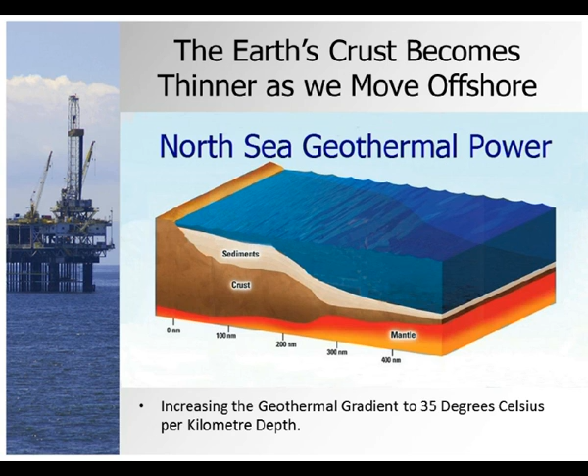If you look at the map of the fields and pipelines within the UK North Sea, there's approximately 230 oil fields and 100 gas fields. There's been over 2,900 oil wells drilled and 1,200 gas wells drilled. There are currently about 450 structures in the North Sea, with a decommissioning cost of between 30 and 45 billion pounds.

But a lot of these structures have only been in place for about 30 to 40 years, and a lot of them have a useful life, especially the concrete structures, of over 300 years. Therefore, what I'm suggesting is that geothermal could be an alternate use for these North Sea structures.

So instead of extracting the oil and gas and bringing it ashore and burning it to generate heat, we just use the natural heat offshore to generate the power directly, without any of the emissions that you get from burning fossil fuels.

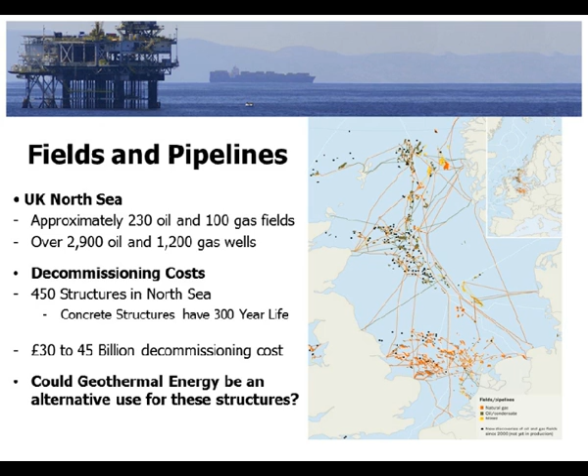One of the advantages of using North Sea structures is that the platforms from which they're drilled quite often drill multiple wells from the same rig.

If you know about geothermal power, the most common system is enhanced geothermal systems. What that means is that you pump water down one or two wells and then receive the steam or hot water at alternate wells after it's passed through the fractured rock structure, which transfers the heat to the water, the working fluid. It then comes up to the surface and quite often goes through a heat exchanger.

So that only a clean working fluid passes through the turbines and generates the power, and then the water is re-injected, so there's no pollution. It's a completely enclosed system, and all you're transferring is the heat from the geothermal field up to the turbines where the power is produced.

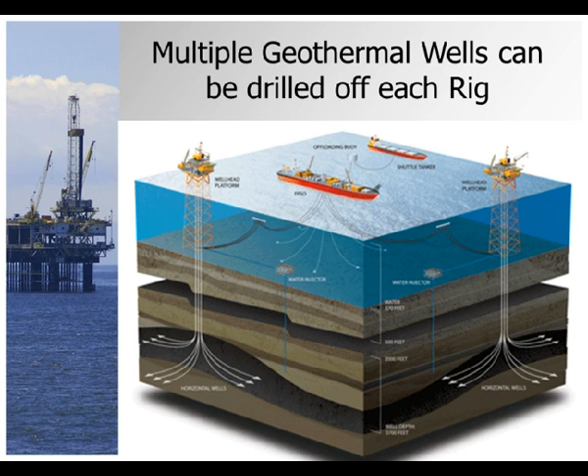Jobs and carbon credits. Geothermal could create a whole new North Sea industry, employing thousands of workers in new productive jobs in the offshore and onshore support industries.

Geothermal power holds enormous opportunities to provide affordable clean energy that avoids greenhouse gases like carbon dioxide. Geothermal energy is true baseload, producing electricity 24 hours a day, 7 days a week.

The continental shelf in the UK, where these platforms are situated, has a relatively thin Earth's crust, about 10 kilometres thick, compared to 40 to 70 kilometres thick on land, giving the wells high bottom hole temperatures. Typical geothermal gradients of 35 degrees centigrade per kilometre have been recorded on the continental shelf.

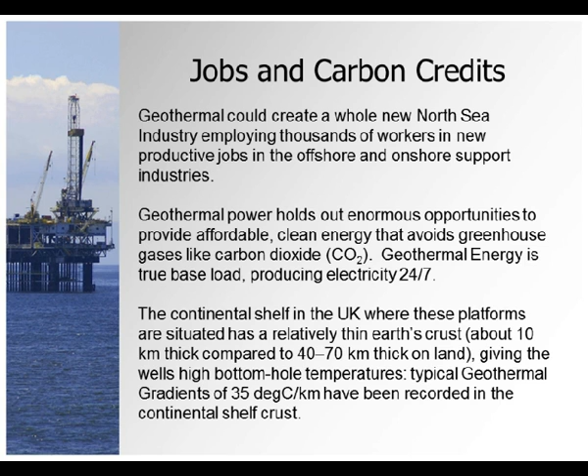The Scottish Parliament has stated no new nuclear power stations within the Scottish borders. Therefore, what I'm suggesting is that geothermal power may be an alternative to this lost power production of the nuclear power station.

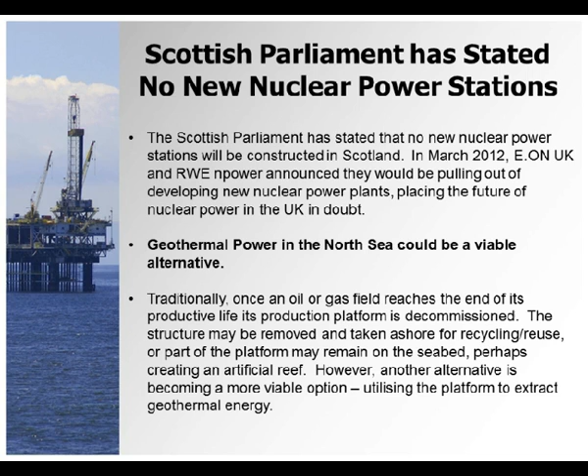And again, as a nuclear power station operates 24 hours a day, 7 days a week, so also can geothermal operate 24 hours, 7 days a week, producing true baseload power.

An example of the geothermal potential is the Erskine high temperature, high pressure field. This includes bottom hole pressures of about 14,000 pounds per square inch and temperatures of 175 degrees centigrade. The wellhead shut-in pressure was 10,600 pounds per square inch at 150 degrees centigrade, with a water depth of just 300 feet, located about 150 miles east of Aberdeen.

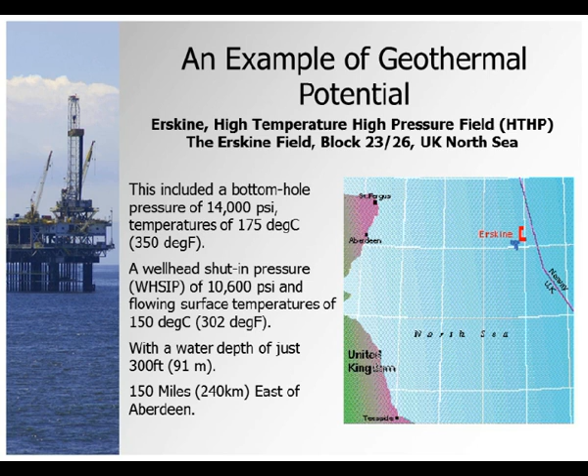The Elgin-Franklin field also has high temperature and high pressure. It's the largest high temperature, high pressure development, the world's largest, giving a pressure of 15,950 pounds per square inch and a temperature of 190 degrees centigrade.

A new record-breaking well was drilled to a depth of 6,100 meters, with a temperature of 197 degrees centigrade and a pressure of 16,750 pounds per square inch. This gives a geothermal gradient of 32 degrees centigrade per kilometre depth.

So we can see from these examples that the geothermal energy is already there. Further geological studies and mapping need to be done. It would be useful if all the oil companies could map the bottom hole temperatures of the wells as they drill them and produce three-dimensional maps which could have all the temperature bands logged together.

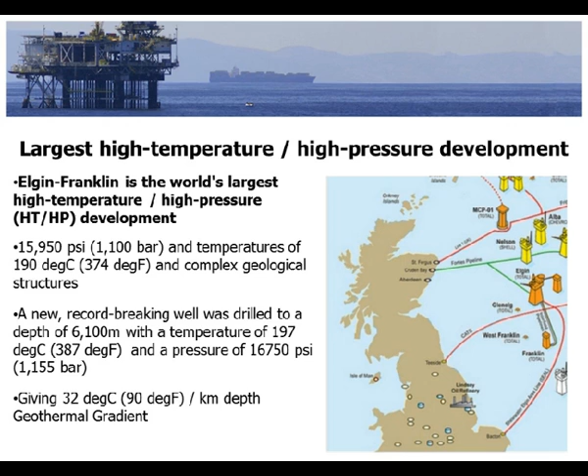By doing this we could see where potential geothermal fields are located within the North Sea. So this is something the oil companies can work on now: coordinate and collate the bottom hole temperatures of all their wells. Also, if you drill wells and strike water or steam instead of oil and gas, note the pressures of these hydrothermal fields, and the pressure of the steam, because as geothermal becomes more popular, instead of just plugging and abandoning these wells, they can still be used.

We'll look now at the technology. Baker Hughes has a demonstration site in America for enhanced geothermal systems. They've drilled to a depth of 10,000 meters and produced temperatures of 300 degrees centigrade, and they've produced metal bearing drill heads with special greases that can operate at these high temperatures.

They've created a geothermal ultrasonic fracturing imager, which can do well logging at these temperatures and show the fracture image of the reservoir. So the technology is already available to operate at 300 degrees centigrade.

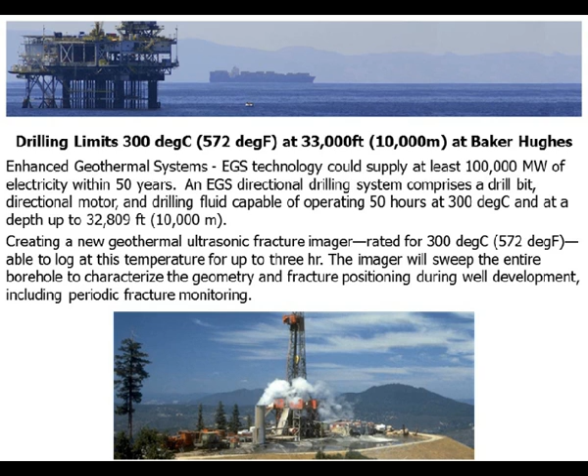The design study we're working on with the North Sea Geothermal Power Project may lead to the construction of two North Sea interconnector hubs to service the geothermal power offshore. One hub would be situated 100 miles east of Aberdeen, connecting Scotland and the Nordic countries - Norway, Sweden and Denmark. The second interconnector hub would be 100 miles east of Hull, interconnecting England, Holland and Germany. Deep geothermal is coming of age, and North Sea geothermal has huge potential when compared with nuclear.

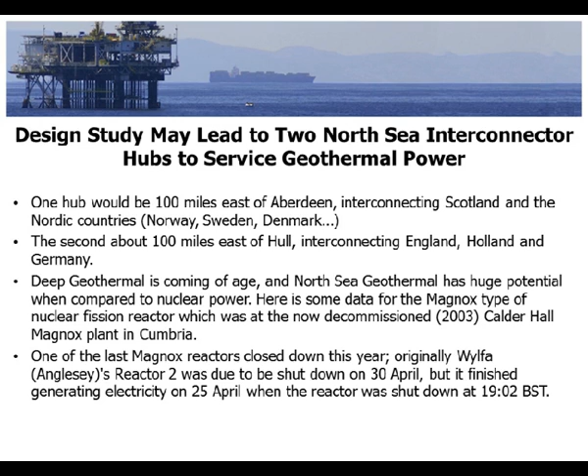Here is some data on the nuclear fission reactor, now decommissioned, at Calder Hall Magnox plant. One of the last of the Magnox reactors, Wylfa Reactor 2 on Anglesey, stopped operating on the 25th of April. Therefore, there is a lack of energy coming from these nuclear power stations, which North Sea geothermal could step in to fulfill as an alternate source to nuclear.

So if we look in detail at these nuclear flow rates, pressures and temperatures, we can see the flow rate was 180 tonnes per hour for the Calder Hall Magnox reactor. The pressure was 14 bar, about 200 pounds per square inch, and the temperature it operated at on the steam cycle was 310 degrees Celsius.

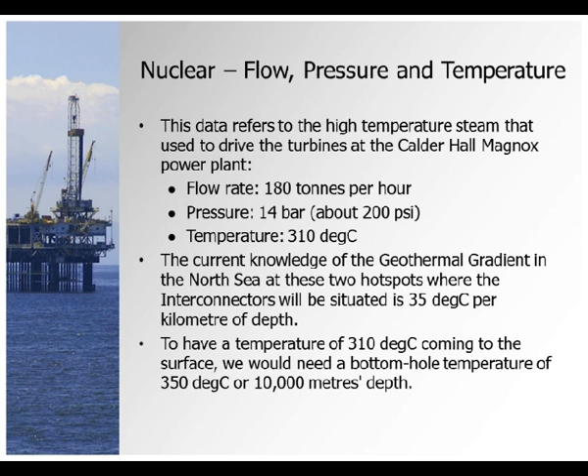The current knowledge of the geothermal gradient in the North Sea at these two hotspots where the interconnectors will be situated is 35 degrees centigrade per kilometre depth. To have a temperature of 310 degrees C coming to the surface, we would need a bottom hole temperature of about 350 degrees centigrade at 10,000 metre depth.

Lamprell has recently been awarded the contract for a jack-up rig to build a Super 116E Enhanced Class. This is designed to drill to 30,000 feet or 10,000 meters. It's going to be fabricated by Lamprell, and the project is planned to be completed in 2014. The purpose of this slide is really just to show that drilling rigs are capable today of drilling down to depths of 10,000 meters.

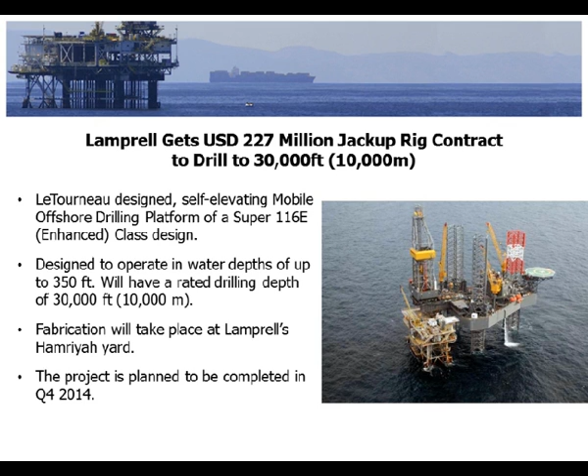And we've already seen that Baker Hughes produce the drill bits, the muds and the logging equipment for operating at these high pressures and high temperatures. Deep geothermal is coming of age. The main difference in the above data will be the operating pressure. The Magnox had an operating pressure of 14 bar, about 200 psi. Geothermal well pressures may be much higher and may need to be controlled by a choke.

For example, the Elgin Franklin is the world's largest high temperature, high pressure development. A new record-breaking well was drilled to a depth of 6,100 meters with a temperature of 197 degrees centigrade and a pressure of 16,750 pounds per square inch. So we can see that the natural geothermal pressure at these depths is much higher than in the Magnox reactor.

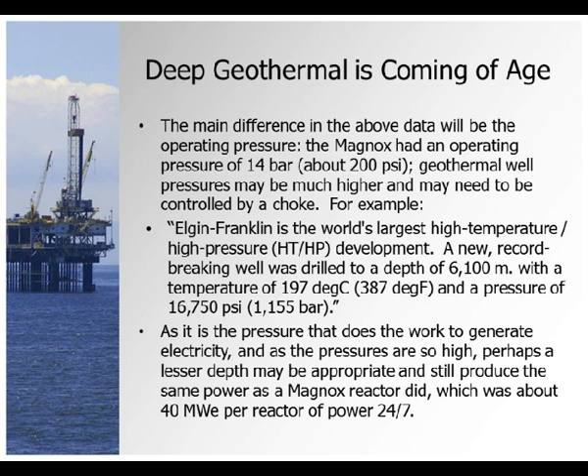As it is the pressure that does the work to generate the electricity, and as the pressures are so high, perhaps a lesser depth may be appropriate and still produce the same power as a Magnox reactor did, which was about 40 megawatts electrical per reactor, producing power 24 hours, 7 days a week.

Geothermal reservoir and scope for licensing: how big will the geothermal reservoir need to be to achieve the same flow rate as a Magnox reactor did, the 180 tonnes per hour? The answer to this, and the size of the geothermal license, may come soon from this Scottish Renewable route map team.

Here's a quotation from a letter which I received from them last June. Further research still needs to be done. I explained in my previous letter that we would be commissioning a research program to identify the next steps to take forward the commercial exploitation of deep geothermal energy, including the scope for licensing. This research is now underway and the results are expected to be available in spring 2013.

So will the geothermal license be by depth? Remember the 35 degrees C per kilometre depth geothermal gradient, or by block, as in the oil and gas exploration industry? I think we will have the answer to this in the spring and summer of next year, and maybe the oil and gas exploration companies will add geothermal to their bow. For instance, I'm aware that BP and Chevron are also involved in geothermal exploration out in Indonesia, so it may be very easy for them to transfer the technology to North Sea geothermal energy.

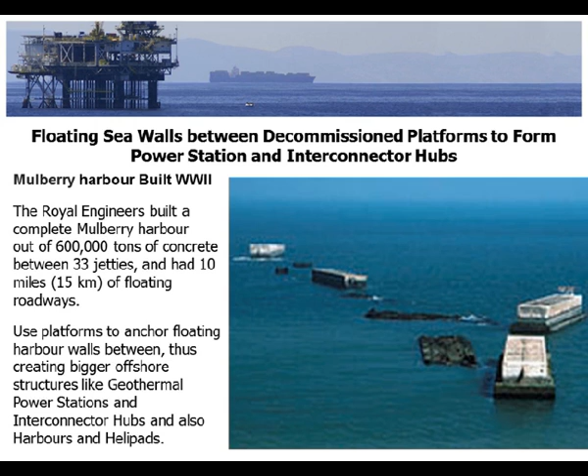What we could do is use the platform to anchor floating harbour walls, thus creating bigger offshore structures like geothermal power stations and interconnector hubs, and also harbours and helipads. Using this floating technology, which was used in the Second World War but brought up to modern day standards, we can build very large floating structures and use the decommissioned platforms as the anchor points to hold these in place, thus creating offshore power stations, interconnector hubs, small towns, harbours, heliports, helipads. There's a lot of possibilities available as we generate the power to power up these structures using the geothermal energy that we're tapping.

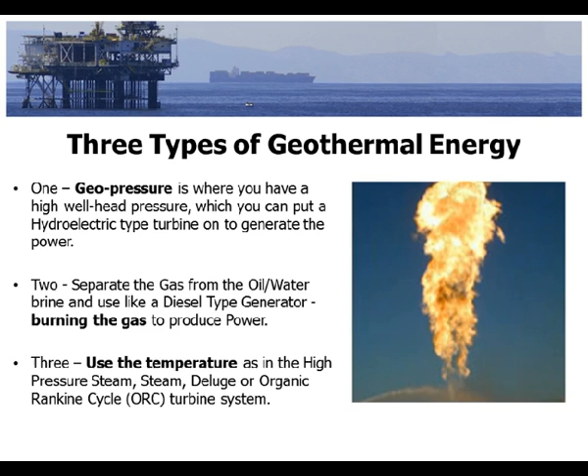There are three main types of geothermal energy. One is geopressure, where you have high wellhead pressure, which you can put a hydroelectric type turbine on to generate power. Two, separate the gas from the oil-water brine and use it in a diesel type generator; this can be used where there isn't enough gas for commercial production. Three is to use the temperature, as in high pressure steam, the steam organic Rankine cycle, or deluge turbine system. These different systems we'll be discussing later, and I'll show you the different temperature bands each operates in to produce the power.

Secondary oil recovery and enhanced oil recovery: geothermal heat can be brought from a lower level to steam flood an oil deposit and create secondary oil in a mature field directly. Approximately 5,000 billion barrels are available worldwide. So the basic concept is this heat could be brought up to the platform first, generate electrical power, and instead of condensing the condensate, the heat could be returned to the oil field level to steam flood the reservoir for secondary oil recovery.

Furthermore, it is also possible to discover lower oil and gas fields when drilling to greater depths to tap the geothermal energy under the platform. So just to give a little more overview about secondary oil recovery, in Louisiana, for instance, what they're doing now is drilling an extra 5,000 meters, and they've found different layers of reservoir sand below the existing oil and gas wells that are becoming depleted.

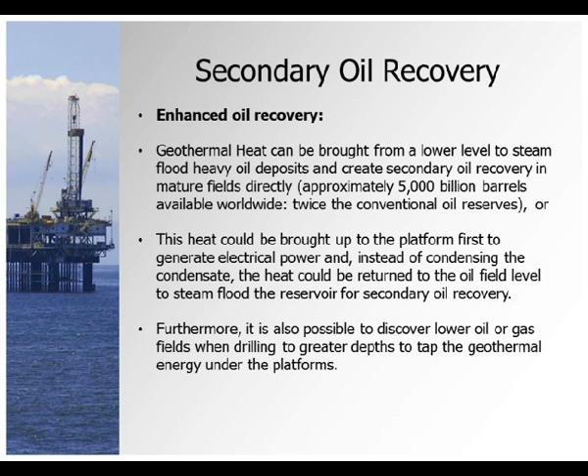The same thing may happen in the North Sea as we drill deeper to tap the geothermal energy. We may also discover these lower reservoir sands that have yet to be discovered reserves of oil and gas. There's a huge quantity of heavy tars and heavy oils that can't be recovered unless the fields are steam flooded. Geothermal is a way where we can generate the power for this extra pumping and also generate the field pressures to do this secondary oil recovery.

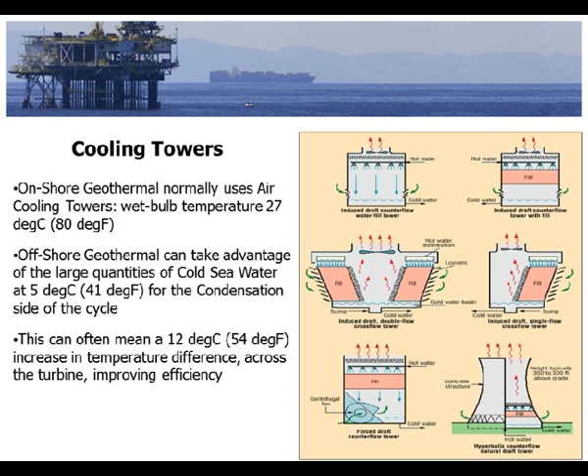Cooling towers: onshore geothermal normally uses an air cooling tower with wet bulb temperatures of 27 degrees centigrade. Offshore geothermal can take advantage of the large quantity of cold seawater at 5 degrees centigrade, which can often mean a 12-degree increase in temperature difference across the turbine. For instance, if we're using the deluge system, which operates at a temperature of 80 degrees centigrade and needs a 100 degree Fahrenheit temperature difference between the input temperature and the external temperature, using cold seawater means we can have a lower input temperature, so virtually every location in the North Sea can produce this low-grade heat to generate some geothermal power.

We'll look now at the different types of geothermal power stations that are currently available.

This natural gas letdown generator uses gas pressure - it uses the geopressure of the well, and can produce 1 megawatt of electrical output operating at 177 to 288 degrees centigrade with an operating pressure of 600 pounds per square inch, or 42 bar.

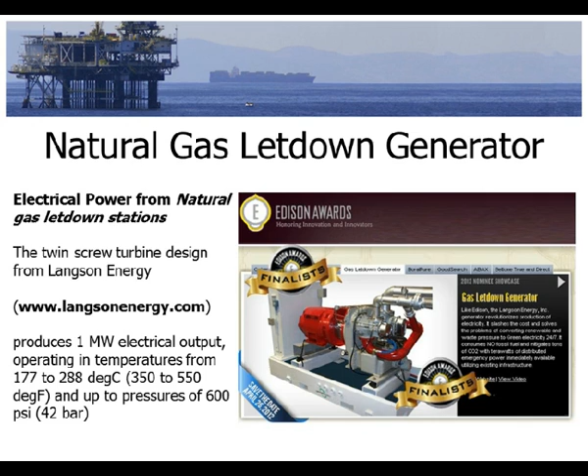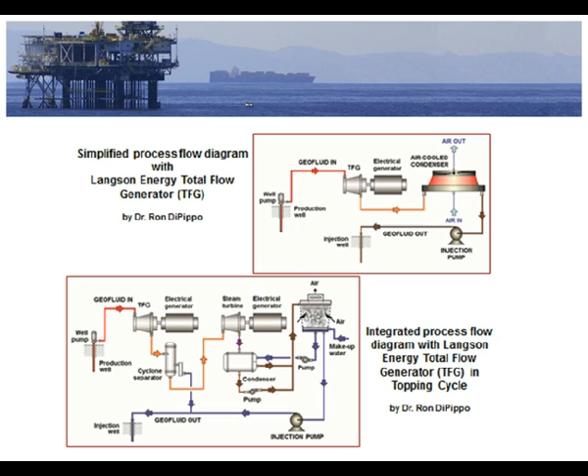Here's a simplified flow diagram of the Langson total flow generator, and the integrated process flow diagram with Langson Energy total flow generator in the topping cycle.

The main component of the total flow generator is a helical screw expander. As either only a gas, only a liquid, or even a dual state combined liquid-gas fluid passes through the total flow generator, the gases expand and also reduce their pressure.

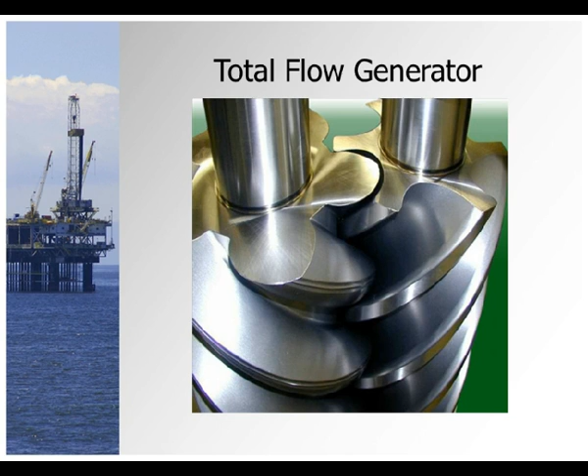This can also happen in a gas main distribution system where you have different gas mains operating at different pressures. Instead of just wasting the energy as you go from one pressure to another, you can use the total flow generator to generate power as you're changing pressure.

The Langson total flow generator has an efficiency of 65%.

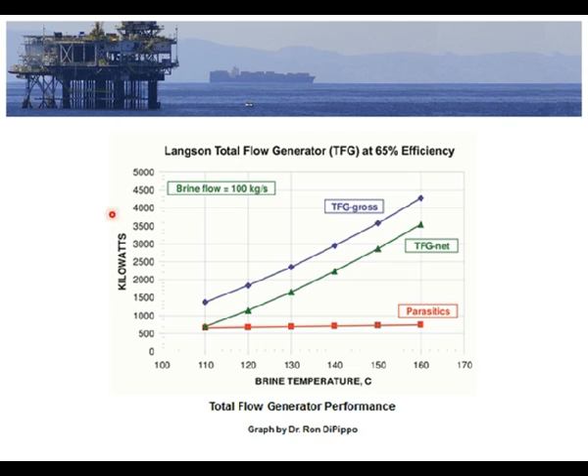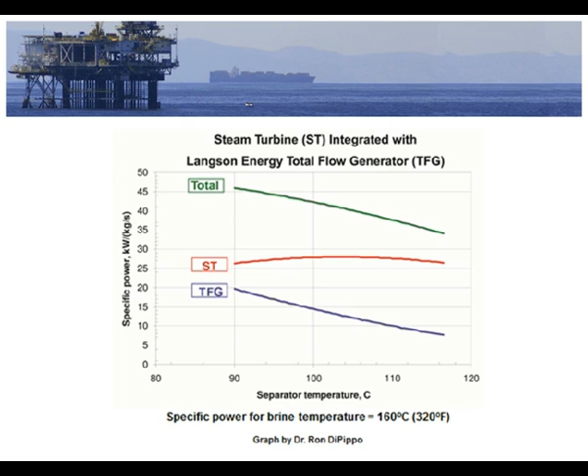If you look on the bottom scale here, you can see the various temperature ranges and the different kilowatt outputs from the different temperatures. With the steam turbine topping the Langson system, you also get this extra output result.

One of the more interesting generator systems is a 12 megawatt renewable power generator by TurboJam. This is interesting because, for instance, if we wanted to produce a nuclear-sized power station using geothermal as the energy source, all you'd need to do is connect four of these 12 megawatt renewable power generators in series with each other to produce 48 megawatts of power, which is equivalent to the Magnox reactor.

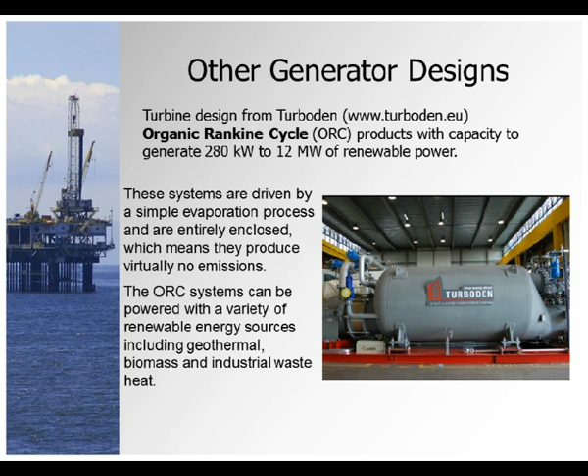The lowest temperature design system, as I mentioned earlier, is a deluge. This has an operating temperature of 82 degrees centigrade and uses liquefied CO2 as the working fluid.

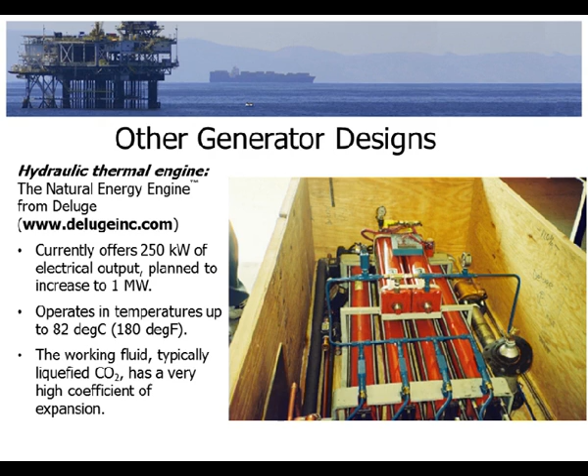Again, there's a huge temperature band from high pressure steam, organic Rankine cycle, and the deluge cycle, so that you get many different options.

Other generator designs include a single borehole geothermal energy extraction system. This works in a hydrothermal field. Basically, it's a single borehole system, which means what you need is circulating fluids around this downhole heat exchanger, which you would have in a hydrothermal field.

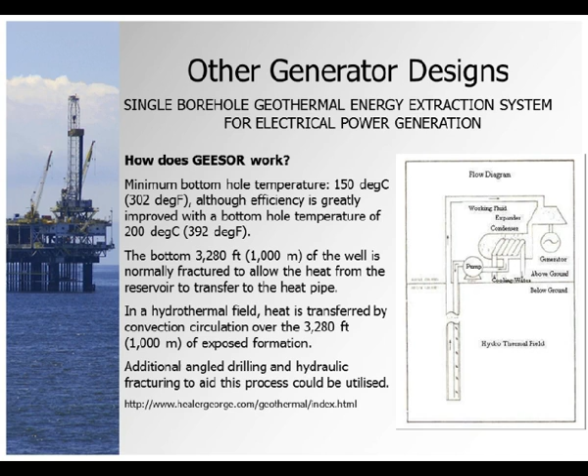All you're doing is bringing a clean working fluid up the pipe and going through the turbine, through the condenser, and you have a closed loop cycle in operation, generating power 24 hours, 7 days a week.

Another interesting cycle is the Kalina cycle. This claims to have a 50% efficiency improvement. It uses ammonia and water as a working fluid.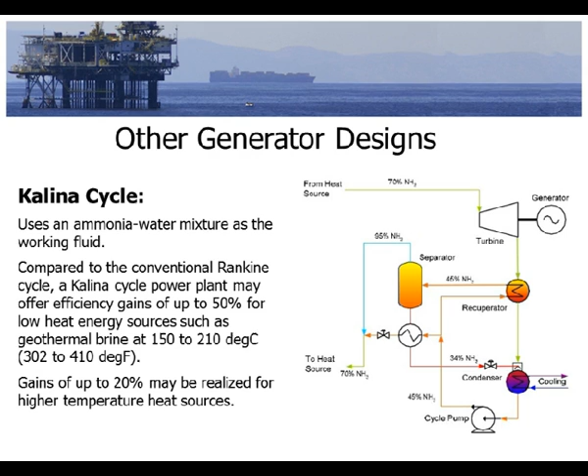Again, it can work at medium temperatures, 150 degrees centigrade to 210 degrees centigrade, but it can also gain up to a 20% improvement in efficiency at higher temperatures as well.

So what do we do with the electricity produced offshore? Remember that geothermal is true baseload electrical generation, operating 24 hours, 7 days a week, just the same as the Magnox nuclear power stations did.

The electricity can be used locally to power the offshore rigs. This means they don't have to burn their own oil or gas, which means there's more available to be sold into the marketplace.

It can be transmitted onshore via electrical cables, which was the reason for the interconnector grids we talked about earlier. The electricity can also be sold to different countries and therefore create an income back to the UK.

It can be converted to hydrogen via electrolysis, creating an alternative fuel. This can be done offshore, or transmitted by cables with electrolysis plants at each filling station, removing the need for petrol tankers and oil tankers delivering fuel to filling stations. Via electrolysis, the hydrogen can be generated at source where it's needed.

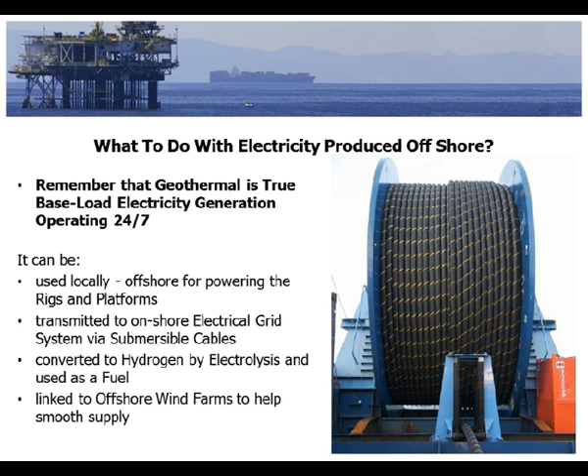It can be linked to offshore wind farms to help smooth supply. The problem with wind farms is you get variable wind speeds and variable power output, but by connecting geothermal into that same power source, it gives you more stability within the source.